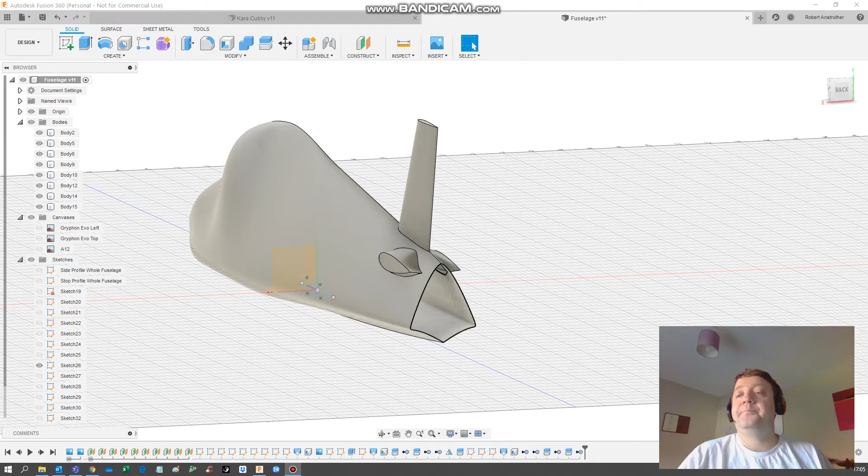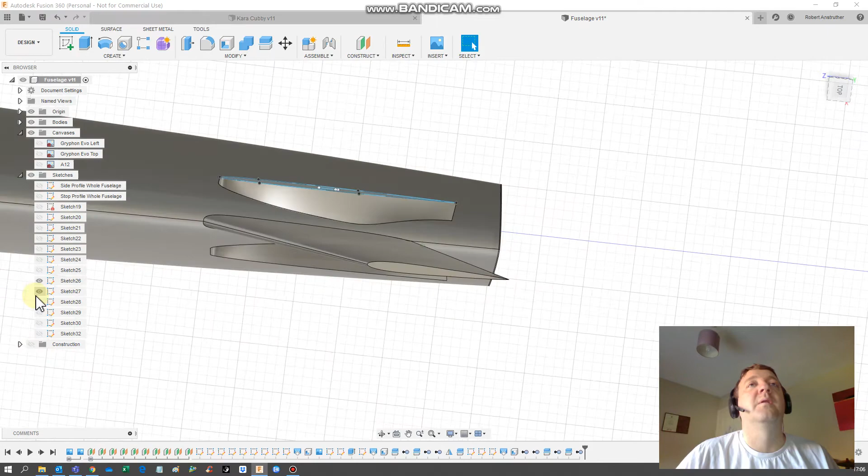Okay, so it's very similar to what we've done before. I want to copy the profile from the horizontal stabilizer root, which is here. So I'm gonna... is that one or is it that one? Let me turn the bodies off to see what I'm doing. Okay, it's not that one.

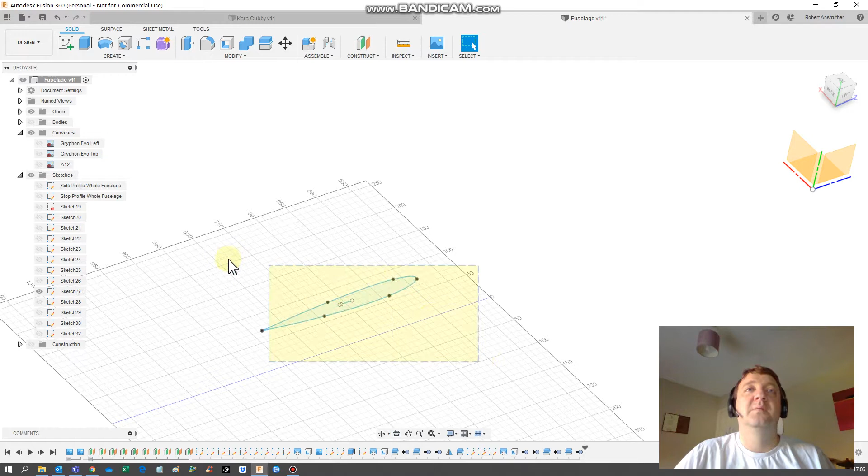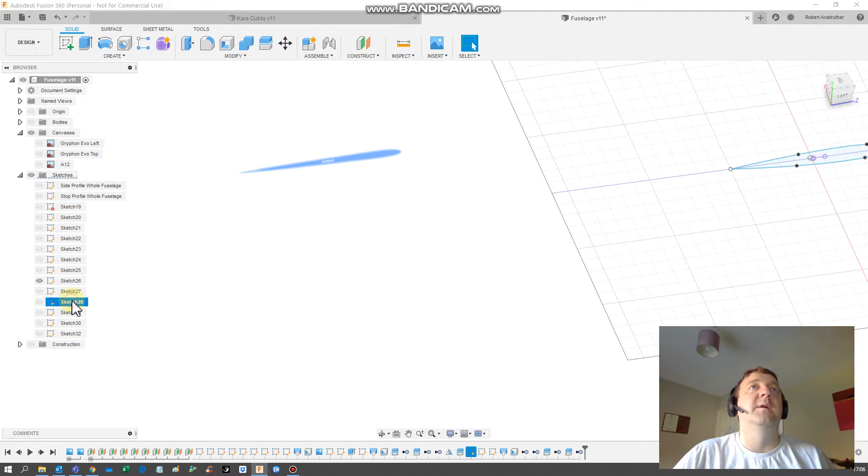It's this one. So go to... why has it done that? Okay, instead I'm going to go back to the original one that we created. I'm going to copy it. However, what I am going to do is... not that one, not that one, that one. I'm going to create a sketch on that. I'm going to paste.

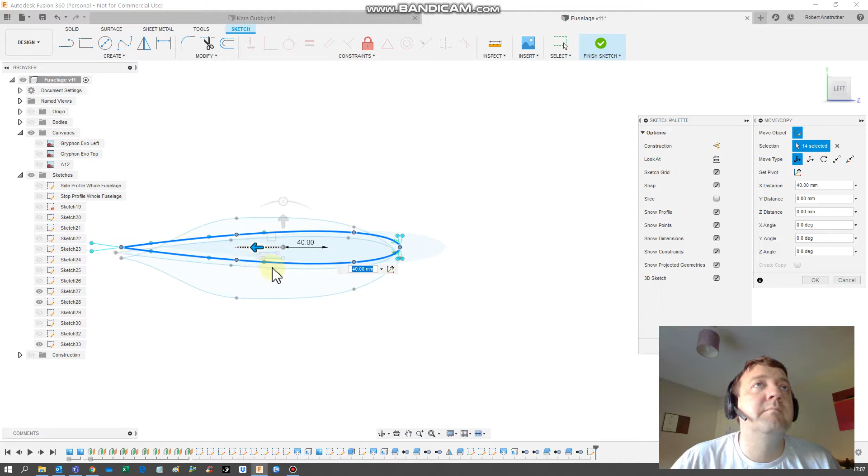You see, I'm just clicking the little arrows now. Falls into place. That looks like it's bang on.

So now we want to scale this back from this point. So we want to pull the front back. So I'm going to try this. There, create.

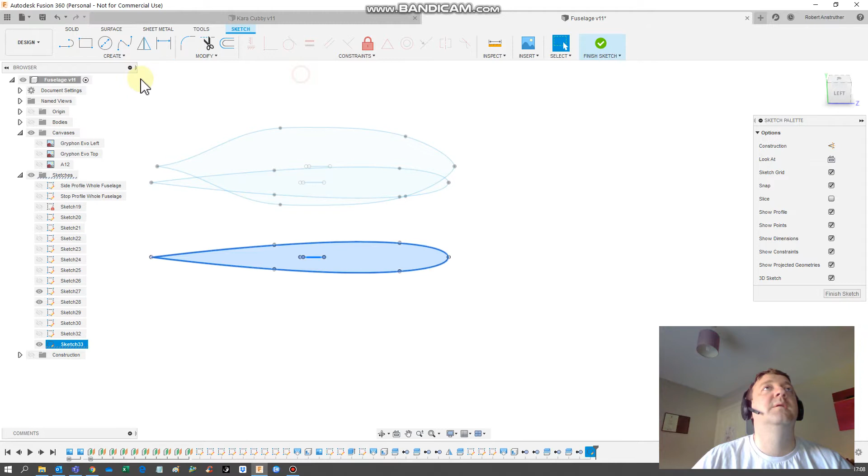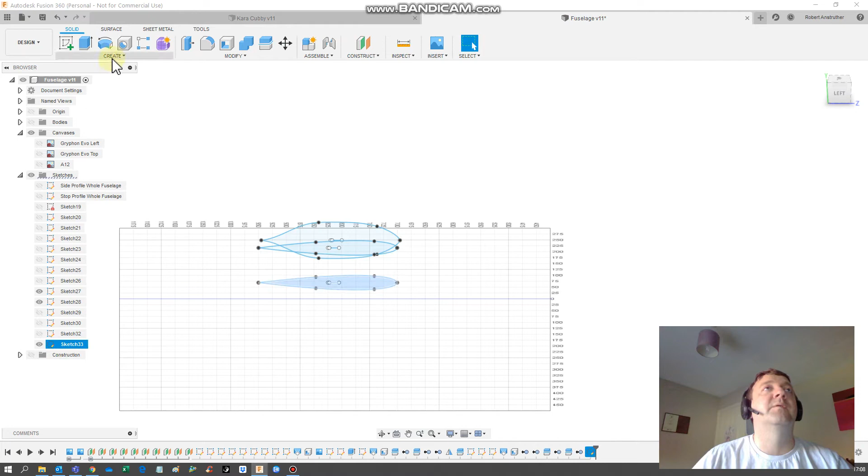So let's finish the sketch first, then modify scale here. That's right, try it again from... I'm just going to try and select it from here and do it. Okay, that worked. So 0.3. Let's just say that.

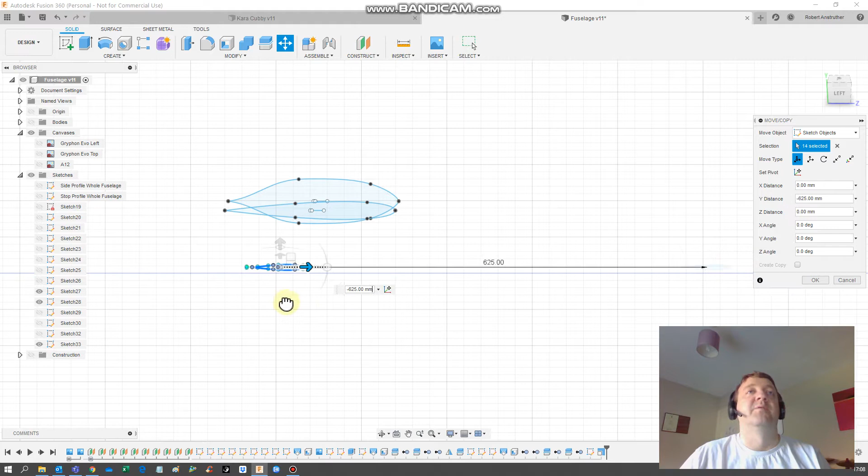And then we're going to move this again. Again, I'm probably not doing it right, that's why it's never in the right place, but it's never really been a problem. So okay, and then I'm going to move it out this way. We're going to have a really ridiculously large...

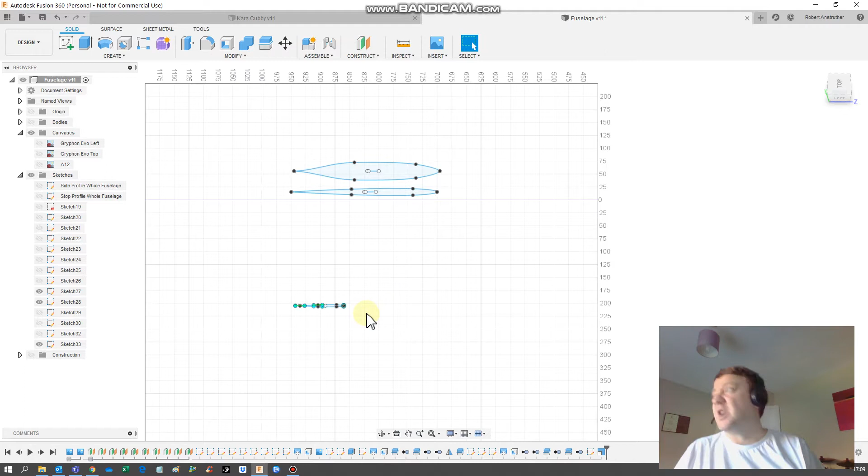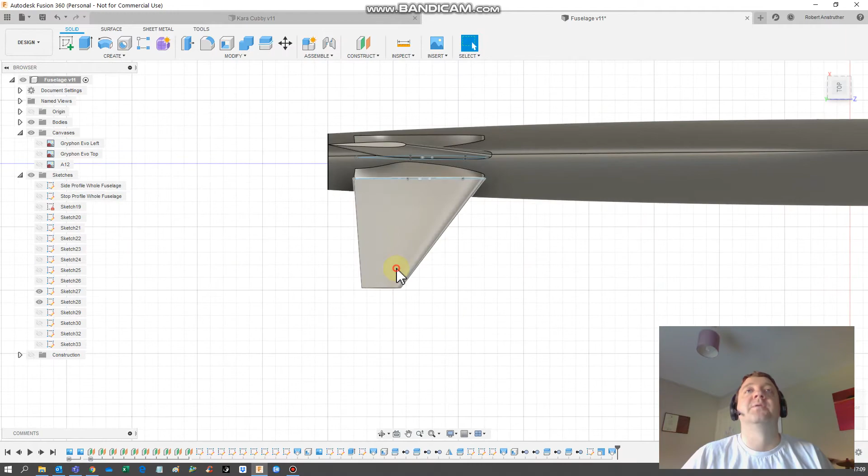Okay, so you just have to get where it should be. I don't know if you need to add washout, and I'd add washout to the wings on mine, but you might just keep it straight, which I've done right now. And then we're going to loft this to here as a separate part. So loft this to here, new body, because we want it to be separate. Okay, so now you can see here we've now got a horizontal stabilizer.

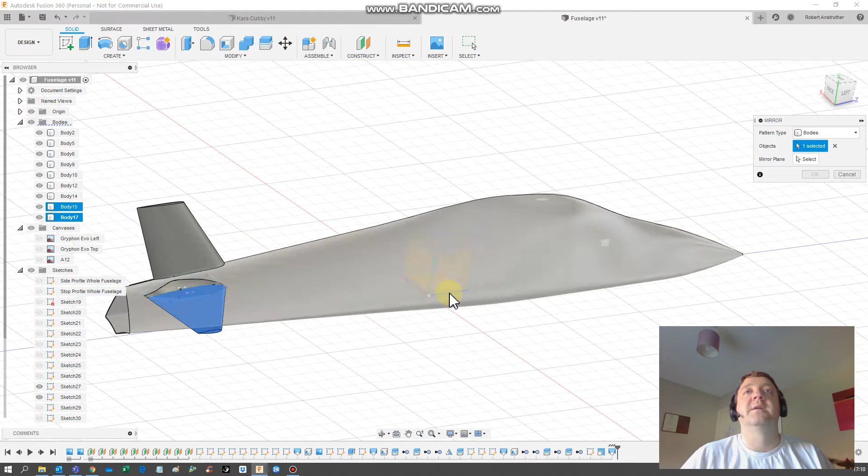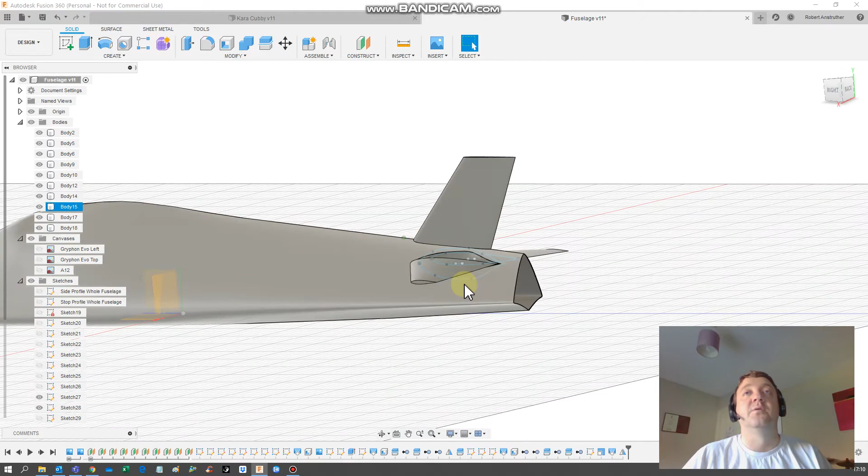And as with the other side, we are gonna mirror this. So create, mirror, turn the origin back on, pick the mirror line, which I think is... turn the bodies off. Mirror plane, that one. Hit OK, turn the bodies back on. Tailplane is nearly done. As I said, you're obviously going to spend more time getting your dimensions and things like that. You can dimension as well, of course. But for a tutorial, that's the way I would do it.

So we have the bulk here. You can bulk this part out more. So just as an example, I'm going to edit that, whatever sketch that is. Not that one, not that one. It's not that one, it's just this one. Okay, so if I just move this... my computer's now computing.

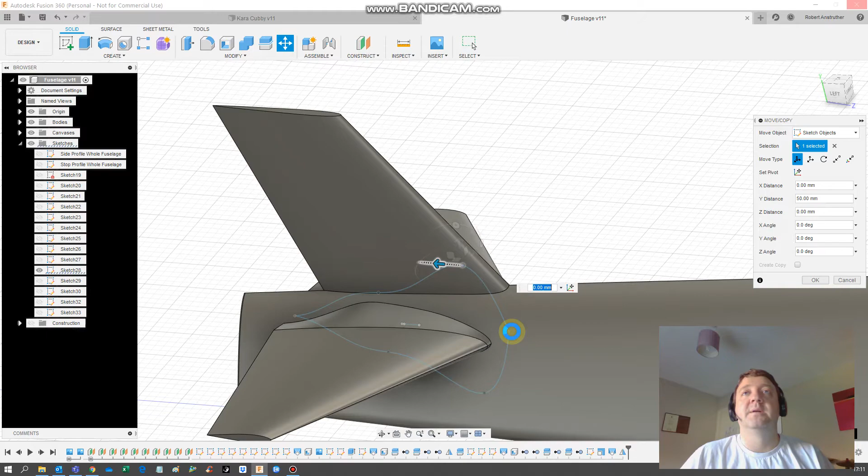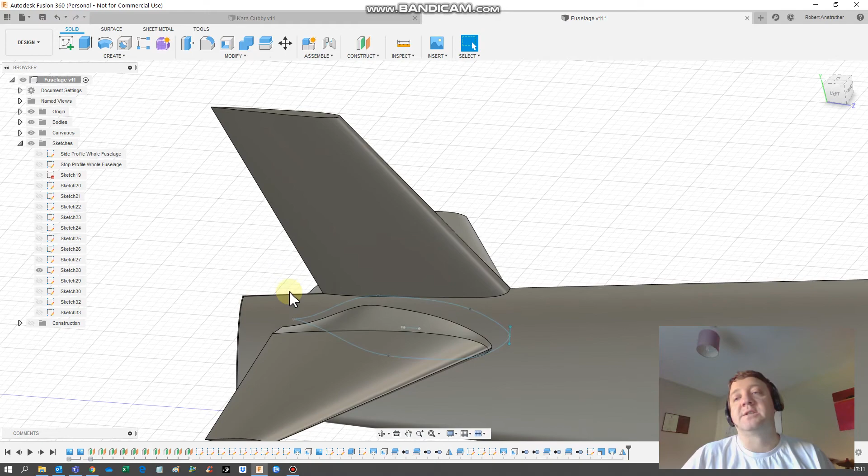So what's happened there is I've tried to change that. It's kind of messed with it because it's changing all of the actions that happen after it, like the cuts and the adds and the joins, etc. But anyways, you get the idea of it. For the wing, you kind of do exactly the same. This is where you want your root down here, you just figure out where you want to put it.

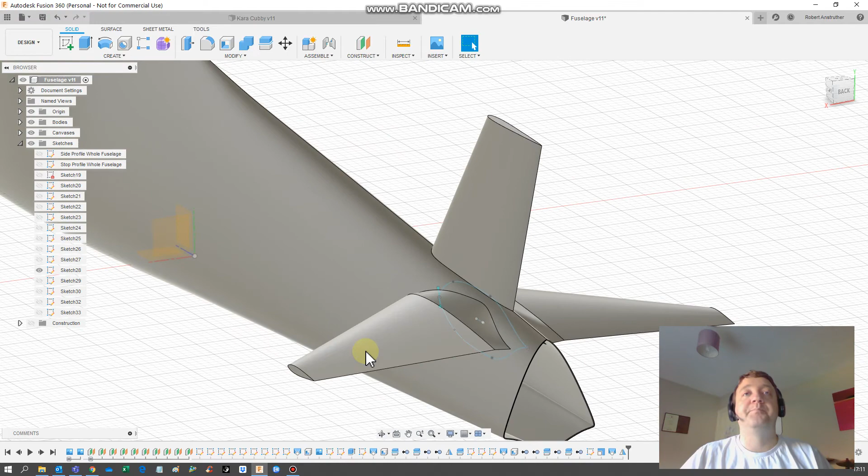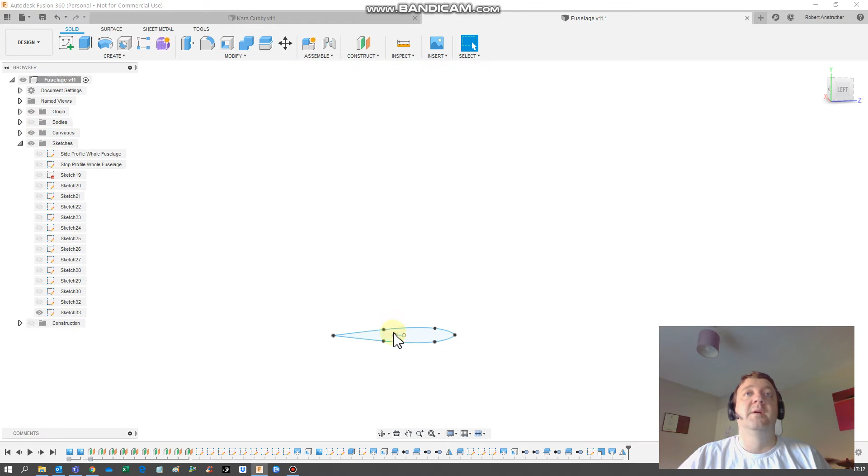Create the horizontal stabilizer the same way. I will do the wings in another video. But, you know, if you want to add some washout, for example, and as I said, I will do it in another video.

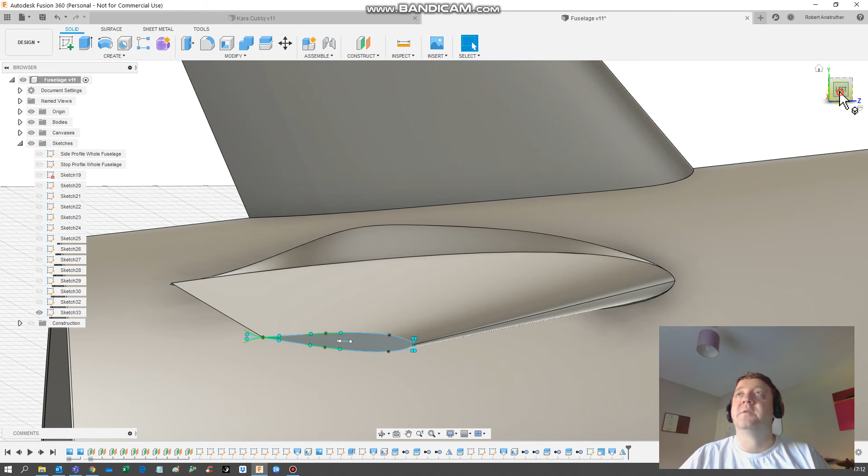But here, what you can do is if you go to the side view, you can click here, or you can click here, and add like say 3 degrees of washout, for example. And then you turn your bodies back on, go to your left view, and now you can see there's a little bit of washout added. I can't remember if the washout starts at the front or from the back, but anyways, you get the idea.

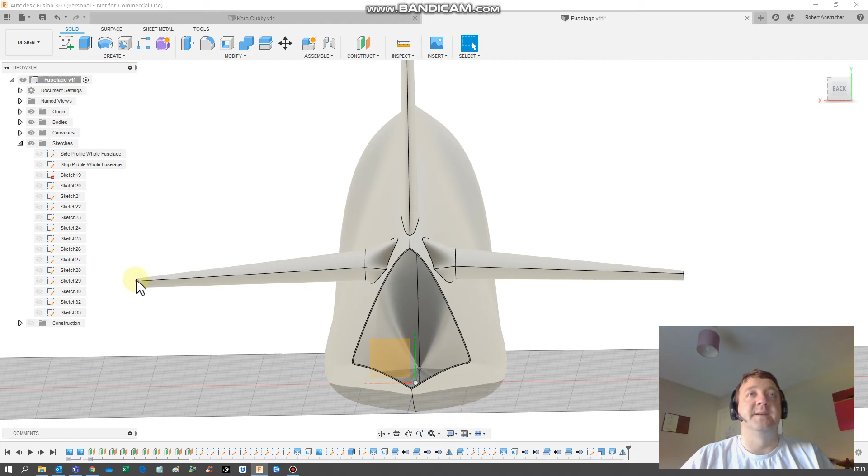So from here, you should be able to pretty confidently create your tailplane. If it needs dihedral, etc., you need to think about all that. You can see at the moment this is actually coming down because this end profile isn't in the center, and that's something else you have to do. But hopefully you've got a 1 mil thick now, which is roughly the thickness of the composite.

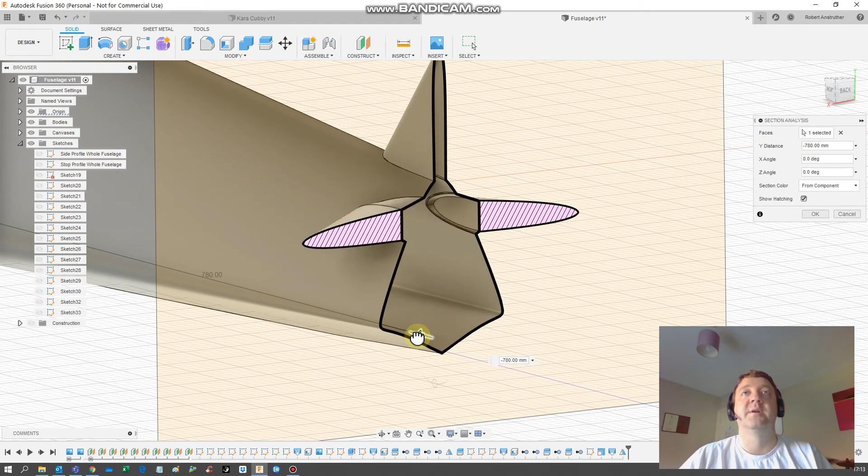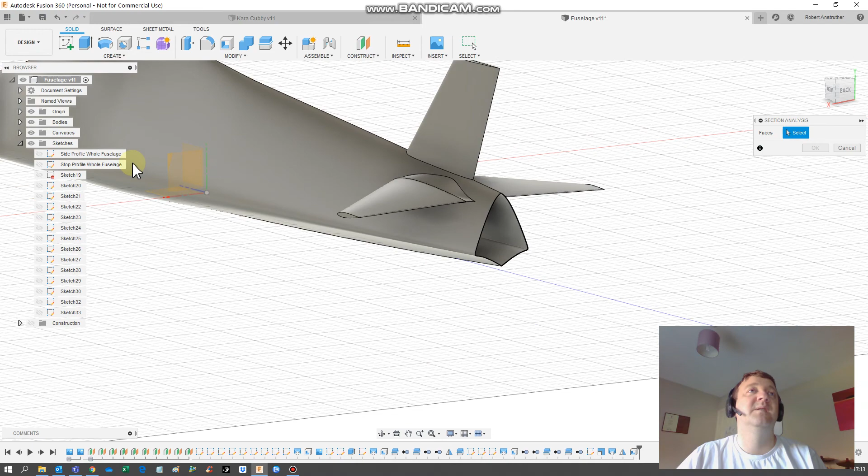Let me just go here, all the way back down here. Oh, that's solid, oh yeah, they're solid right now. We haven't created those as shells, so I'm just gonna do that quickly. Bodies, select my 2 bodies, go to shell, give it 1 mil, done, and then we'll do another inspection, and we can go down, pull this down here, and there we go.

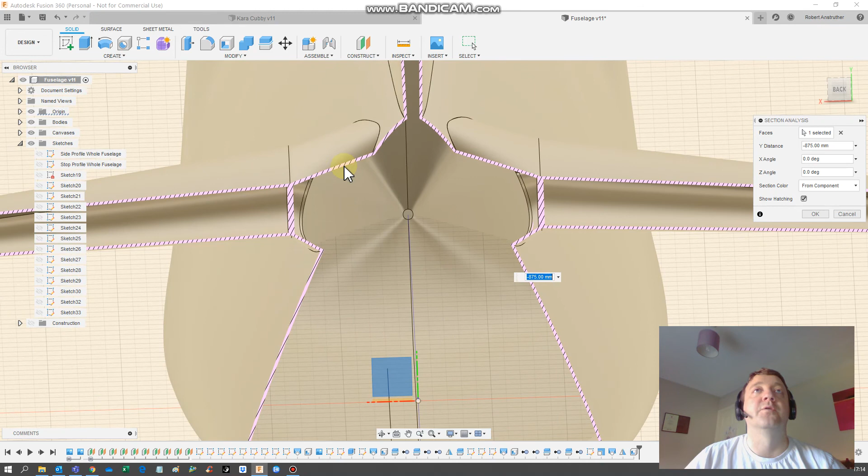Here's where, later on when we fillet around here, it's going to add some more meat around this area. You can see here where the 2 joints are butted up together, but this would be your composite part being laid out. It's not going to be obviously as perfectly smooth as that, but roughly it's right. And when we come later, we'll also add some supports and ribs and things like that, and really define how you want to finish off the model for strengthening, etc.